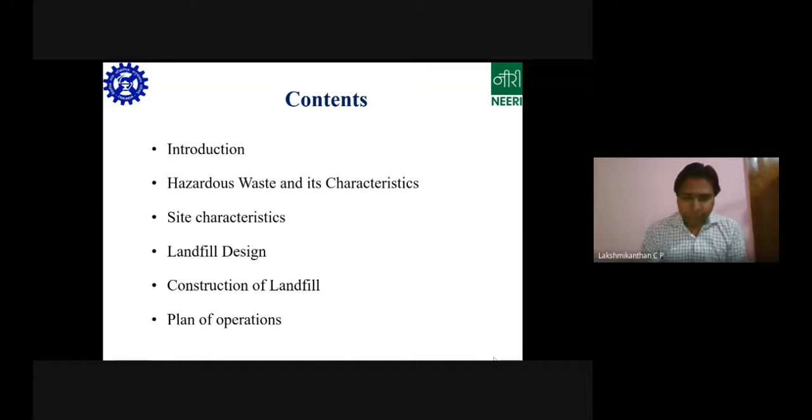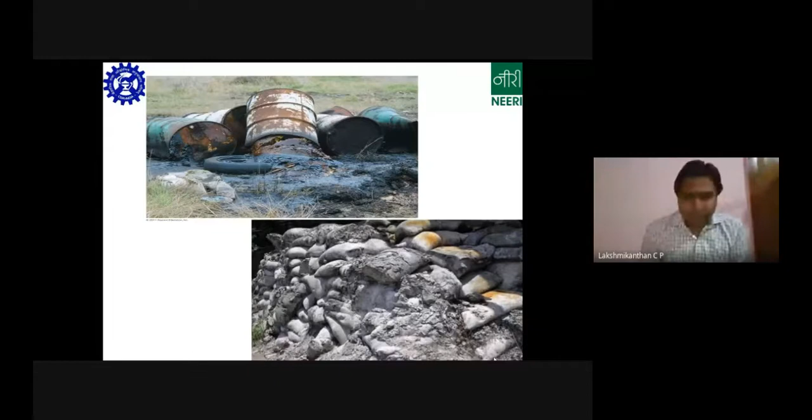Okay, now coming to hazardous waste. What is this hazardous waste? It is any liquid, solid, or gas having some properties. So what are these properties? These properties are, say, ignitability, meaning it easily catches fire. If you put it in an open environment, it easily catches fire without any instigation. So that is ignitability.

Then you have corrosive. If you put it into contact with any metal, it corrodes that metal. It might be a storage tank, a pipe it passes through, anything. Then comes reactivity. Reactivity means it is chemically unstable and it reacts with readily available components. For example, if you put some reactive waste in an open environment, it starts to react immediately, giving some dangerous products. It might be an explosive, or some noxious fumes harmful to human health.

Then coming to the toxic character, it is very, very harmful to living organisms, including human health. It might cause several health problems. It varies. It even goes to the extent of mutation or genetic effects.

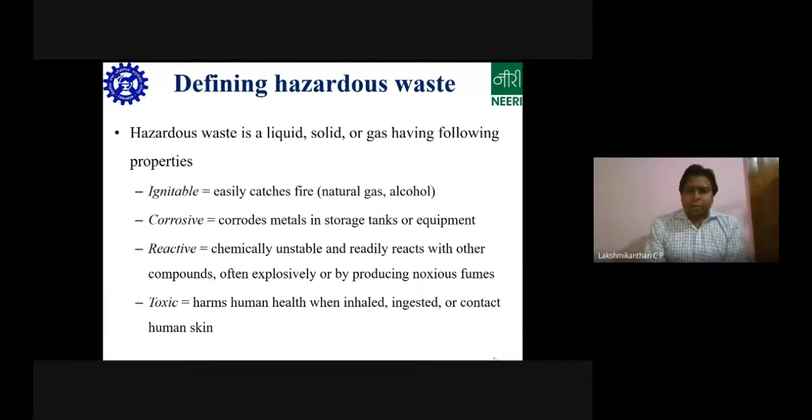So what are the sources of this hazardous waste? Industries are the major sources. Industries produce the greatest amount of hazardous waste. You take any industry, starting from the automobile industry to any chemical industry, pharmaceutical industry. Even e-waste was considered as hazardous waste, but now they have a separate rule for that. Apart from this, electroplating industry, petroleum industry, any other organic industry, tanning industry, leather industry. All these industries produce hazardous waste.

It might be in a liquid form, effluent form, or a solid form. Also your paints, batteries, solvents, cleaners, pesticides, all these also come under the hazardous category. Apart from this, mining also contributes a huge amount of hazardous waste. You know about the mining industry, right? Apart from that, small businesses also contribute, some part of agriculture, utilities, and some demolition waste also.

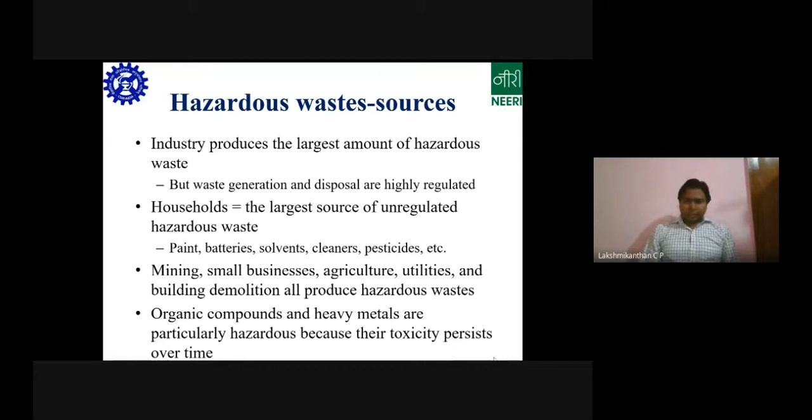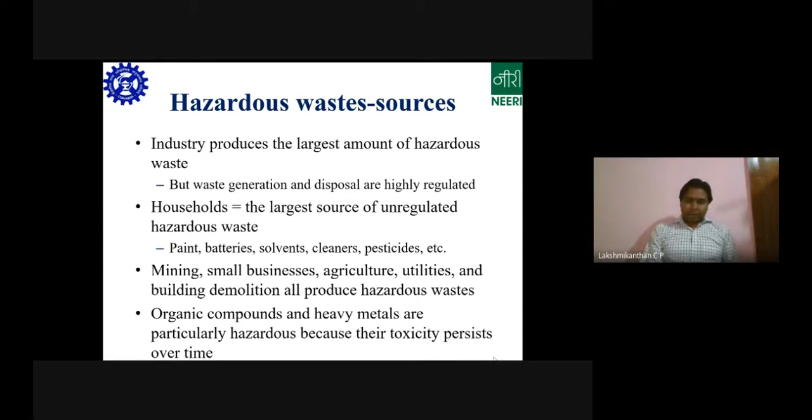Coming to organic compounds, these are also hazardous. There is a list of hazardous organic compounds listed under this category. I won't go into detail, but I'll give you an overview of a few things.

Synthetic organic compounds resist bacteria, fungal, and insect activity. These organic compounds are also hazardous. Some of them are plastics, pesticides, solvents, wood preservatives, etc. They kill bacteria and other naturally occurring organisms. Their resistance to decay makes them persistent pollutants.

There is also a category of pollutants called persistent organic pollutants, or POPs. This category is on the rise in recent days. Most of this comes from daily use items, like powders, makeup items, paints, and other things. All these contribute to persistent organic pollutants.

They are called persistent organic pollutants because once they enter the environment, maybe a water body, soil, or air, they don't degrade. They just stay there, causing harm.

If it is in the water, it is consumed by fish or aquatic organisms. Then when someone consumes that fish through the food web and food chain, it rises up the chain. Once it enters higher organisms, it causes terrific health effects like cancer and other things.

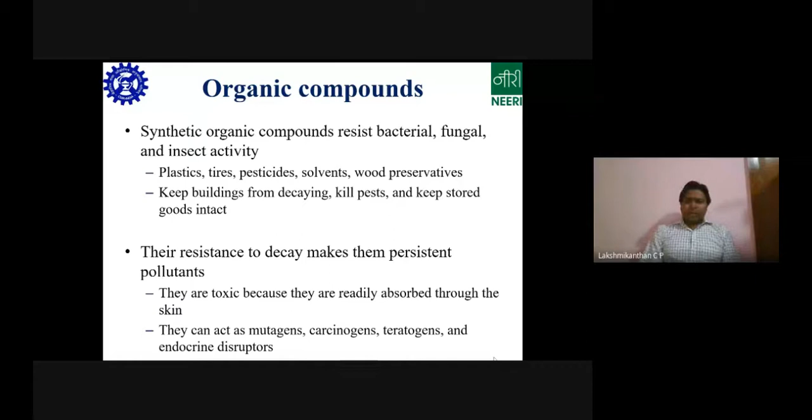All the heavy metals are hazardous. Some are very lethal, like lead, chromium, mercury, arsenic, cadmium, tin, and copper. That is why you have separate regulations and discharge standards for these, whether in water bodies or on land.

These heavy metals are used widely in industries like wiring and electronics. Whatever electronics you get has most of these heavy metals, so you must be aware of that.

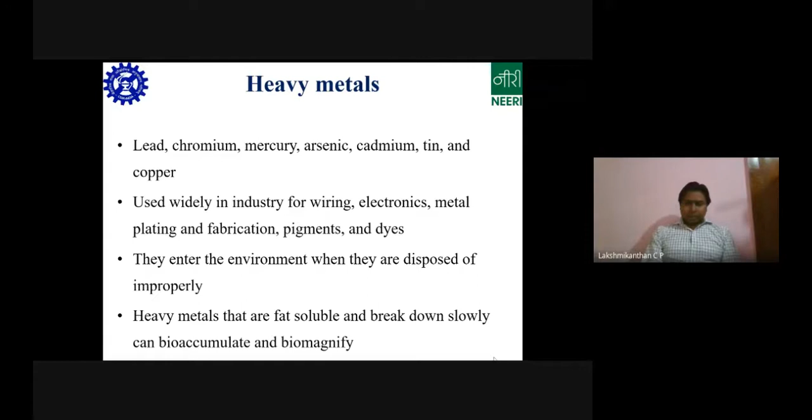Coming to characterization, when we talk about hazardous waste, the most important part is characterization. This is not as simple as other categories of waste, like municipal solid waste or biomedical waste, which have very easy rules, regulations, and treatment methods. The quantity might be more in municipal solid waste, but for biomedical waste and others, you have defined methods like incineration which are being followed successfully to some extent.

But when it comes to hazardous waste, it's really a problematic thing, because there are a number of chemical compounds, organic compounds, and metals involved, with different techniques to remove or treat all these things, and finally bring these hazardous compounds to a form which is not lethal to the environment.

Coming to the characteristics: ignitability, corrosivity, reactivity, toxicity. These characteristics are being tested, and there is a separate test procedure for all these categories. I won't go into detail, but I'll give you some idea of what ignitability is and how it works.

This TCLP test is a toxicity test procedure, wherein you come to know the toxicity level of a particular component. So this is the characteristics part.

Coming to the composition part on the right side, this is proximate analysis. Proximate analysis means you measure all these parameters shown here: physical form, mass balance, moisture content, total volatile solids (TVS), solid content, ash content, elemental analysis, heating value, viscosity, and when it comes to a survey, it's an overall thing that you see directly.

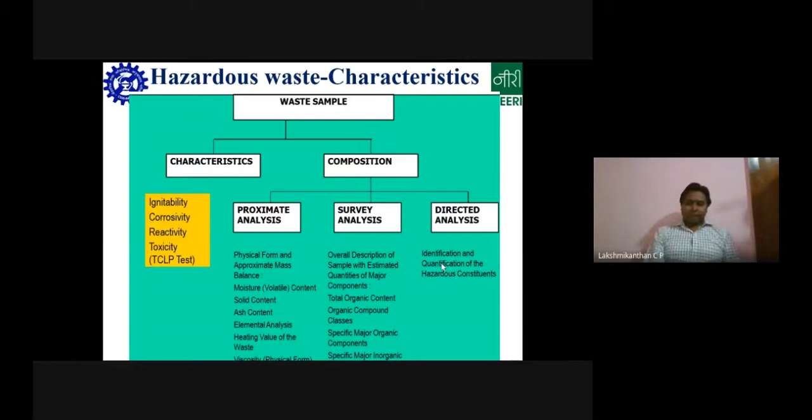So as I told, ignitable means there is something called a flash point. What is a flash point? If materials have a flash point of less than 140 degrees, it means it is ignitable at that temperature. Flash point is the lowest temperature at which evaporation of a substance produces sufficient vapor to form an ignitable mixture with air. So when it comes in contact with air, even a small spark is enough to ignite it.

Examples are alcohols, gasoline, and paints also come under this category. So coming to corrosivity, this applies majorly to liquids, right?

The characteristic is that pH is less than 2. It is really acidic, so it just eats away whatever comes in contact with it. Or, if not, it is highly alkaline, meaning the pH is more than 12.5. So there's a chart given here, I can't zoom in, but it is given here, showing what categories come under what pH - maybe sulfuric acid, lemon juice, all these things.

Then coming to reactivity, whatever components or compounds come under this category are really unstable in the normal or natural environment - things like toxic fumes, gaseous vapors, explosives. Some examples are peroxide solutions. I don't know whether you people have heard about all these things. These are highly reactive, they don't remain in their original form. They react with the environment to give some harmful products.

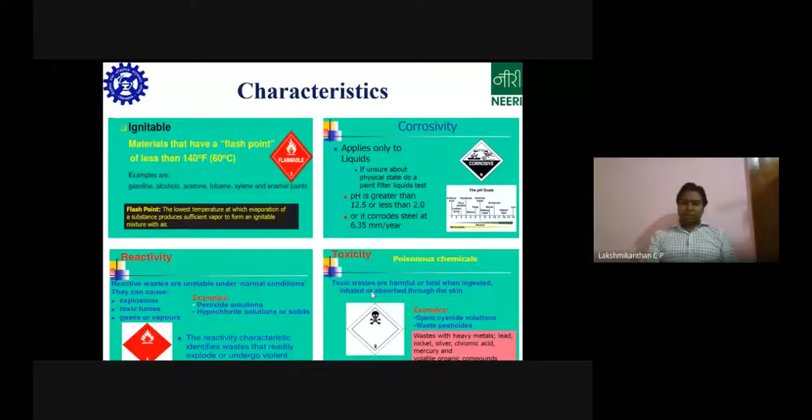Then coming to toxicity, toxic wastes are harmful, fatal, or lethal when ingested. When it goes into your body in any form, maybe you inhale it, or ingest it through food, or it is absorbed through your skin, or in any way it enters your body, then it is lethal. You're going to have some serious effects. So maybe cyanide is one of the things - spent cyanide solutions. Cyanide is used in a number of...

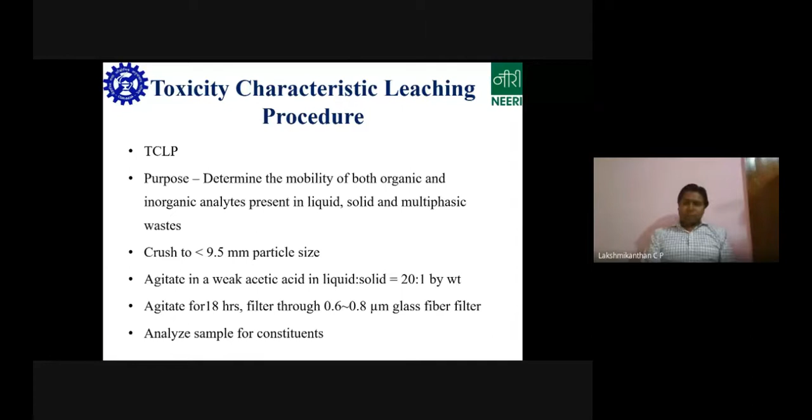So some of the test methods are like SW846. This is for evaluating solid and hazardous waste. There are some example test methods given on the EPA website, that is US EPA, United States Environmental Protection Agency. For example, you have the TCLP test, the method is 1311. There are different methods for different organic compounds, because different organic compounds fall into this category, so you have different test methods, and it varies from 10 to 100.

So method 30, for example, is volatile organic sampling train. Then 31 is for volatile organic compounds. Then 40 is for principal organic hazardous constituents from combustion sources, using Tedlar bags. 50 is for isokinetic HCl and Cl2 emissions. So something like that you have till 100.

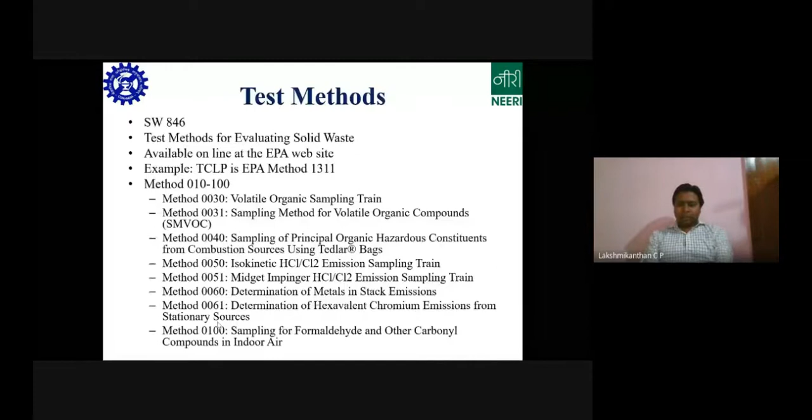So you can check this website for different test methods.

Now the most important part is, before having any final treatment, there is a pre-treatment given to all these hazardous waste compounds. So we will just go through what pre-treatment methods are available, and how it is done.

First comes the adjustment of the physical characteristics. The most important parts are particle size, then moisture content, homogeneity, then viscosity, because they mentioned the multi-state thing. It might be a liquid, a solid, or in between. The viscosity might be a little higher or a little lower.

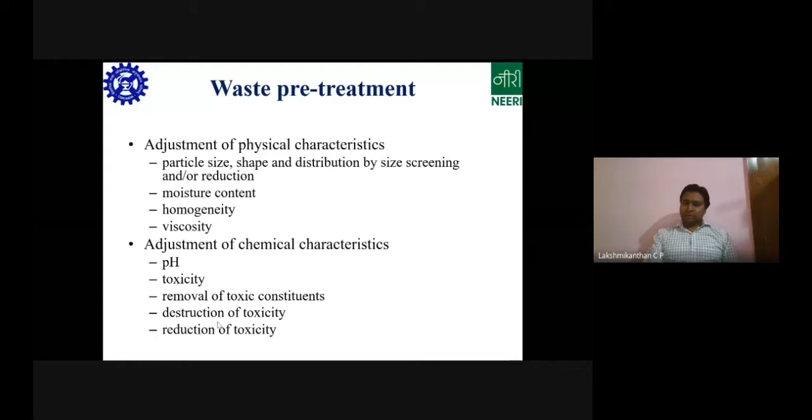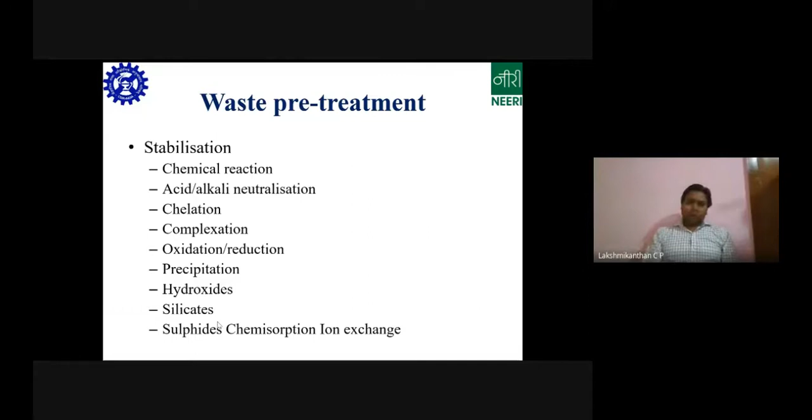Then comes the chemical part. So as you should check pH, you have to remove the toxicity, right? Then stabilization and solidification - these are two very important things in the hazardous waste category pre-treatment methods.

There are a number of chemical methods listed under this category. For example, stabilization is when a compound or hazardous waste arrives, it might have any of the characteristics like ignitability, corrosivity, reactivity, etc., or multiple characteristics. So you have to stabilize them by treating via some chemical process so that it is not reactive.

Some of the chemical processes are chemical reaction, acid-alkali neutralization, chelation, complexation, oxidation reduction, precipitation with hydroxide, silicates, etc., and ion exchanges. I don't want to get into detail, but I will give you some of these procedures which are applicable to some of the waste that are available.

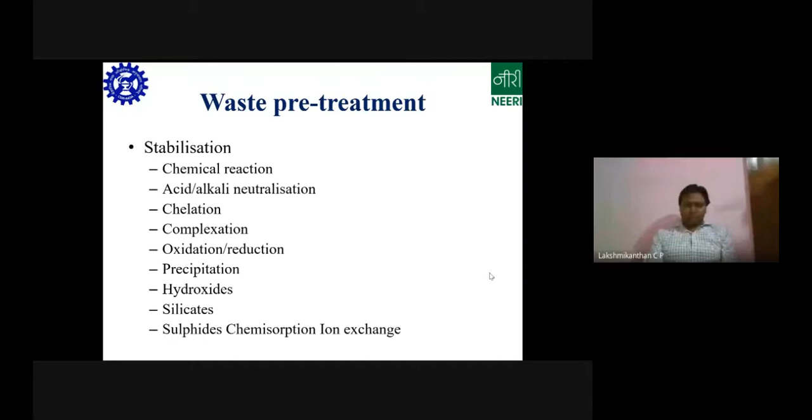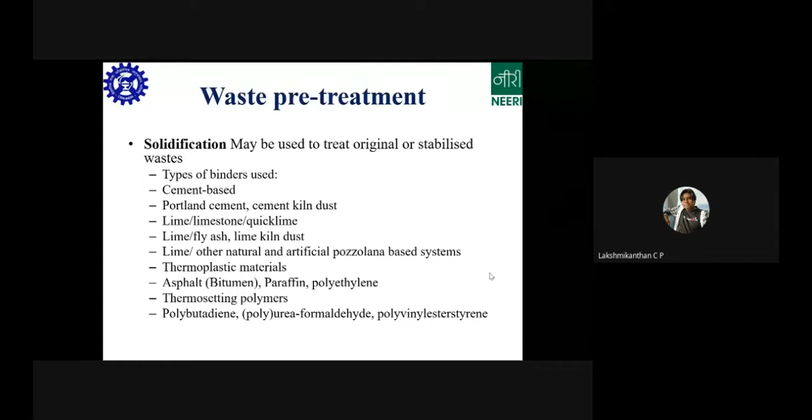Then solidification is nothing but, if it is in a liquid form, we cannot store it, safely handle it, or safely dispose of it. So the solidification part becomes very important to handle the waste. For that, you can use some kind of binders to stabilize it.

Usually they use cement-based binders, then lime or fly ash based binders. Thermoplastic materials are also used sometimes. These are all used to solidify it, and once it is solidified, it becomes very easy to handle.

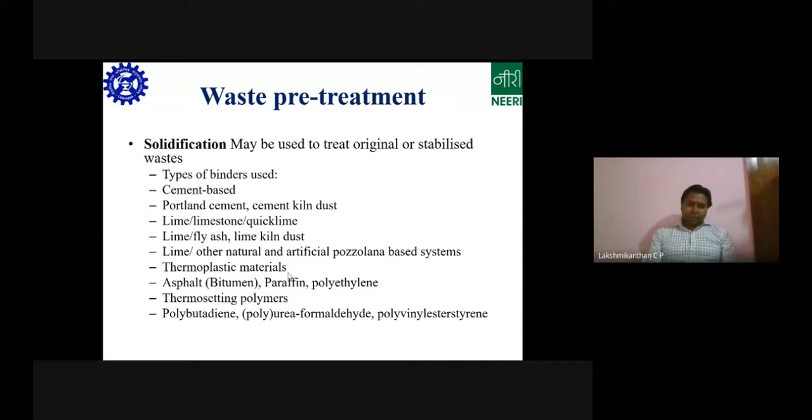As I told, solidification and stabilization techniques are some of the important techniques used to reduce the potential of hazardous waste leaching and improve the handling and physical characteristics. Then it may require some pre-treatment of waste, for example changing particle size, etc. This depends on the type of waste received.

Stabilization is usually followed by solidification - first you stabilize the waste and then you solidify it, right? So solidification refers to techniques that may encapsulate the waste in a monolithic solid of high structural integrity. Something like, if it is in a liquid or semi-solid form, you make it a solid so that it is easy to transport and handle.

Stabilization is the most important part. It refers to several techniques that reduce the hazard potential of the waste by converting the contaminants into the least soluble, mobile, toxic, or lethal form. This is not the final treatment - this should always be kept in mind as a pre-treatment process prior to disposal or landfilling.

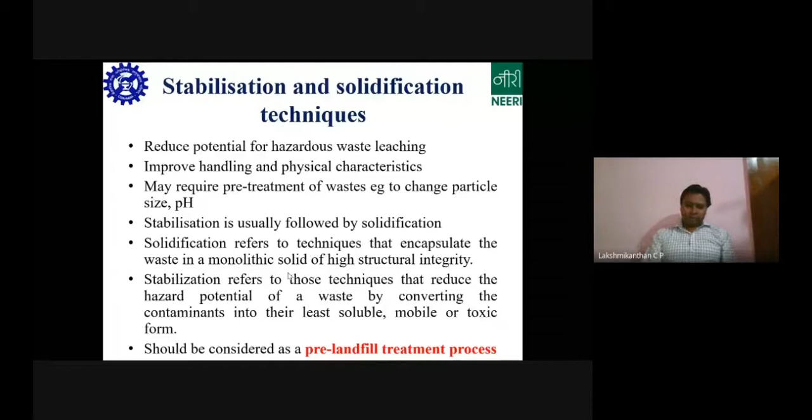As I told, SS is nothing but solidification and stabilization - it's a pre-treatment prior to landfill. This also needs a lot of study, because each type of waste is totally different. Supposing you're getting waste from the paint industry, the petroleum industry, or the tannery industry, obviously each one will have different characteristics.

So it is usually recommended to have a bench scale study or a pilot scale study for some time, to analyze the long-term effects on the environment.

Then you have to decide the end uses based on the long-term effects only. Then hazardous and non-hazardous waste having no leaching properties are good candidates for solidification. So the compounds which don't have these characteristics, that can be used directly for stabilization or solidification.

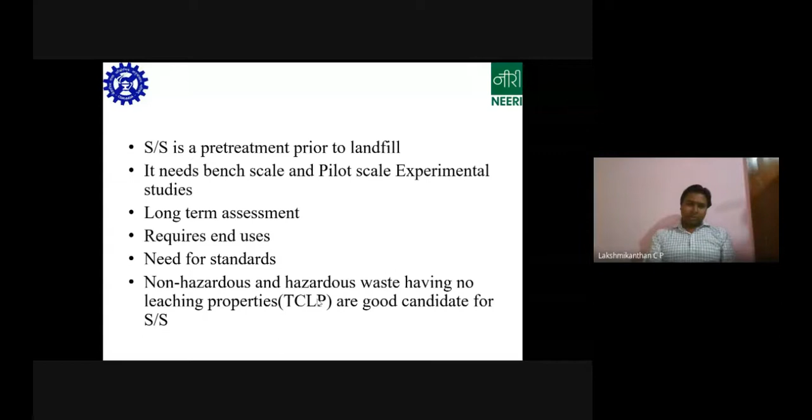So what are the factors affecting the leachability of the waste? Because that is a most important characteristic through which the contaminants or the toxic compounds enter the environment from the hazardous waste. So one of the things is the alkalinity of the waste. Then surface to volume ratio of the waste, then leachate to waste ratio, type of leachate, pH of leachate, contact time, extent of agitation, number of replacements of fresh leachate, extraction vessel, temperature.

So all these things play a very, very important role in leaching of the particular toxic compound or the element. So we have to consider all these things when we are studying about the toxicity of the waste. So these are applicable to different categories.

You might have heard of some gas leak in Vizag during this lockdown. So that was also one of the hazardous gases. So our team from NEERI, they went and they tried to stabilize it. So it was a gas that had settled down with a very high specific gravity or density. It had settled down up to 2 feet from the ground.

So what these people did, they analyzed it and they sprayed some kind of a chemical which will precipitate with it or react with it and form solid precipitates and settle down on the ground. So that is how these people worked out on that. And then later on, when it settled down, the soil or the top layer up till 1 or 2 feet was removed and it was taken to a landfill. Still, there are some tests going on to what extent it has been spread and all those things. But I'm just giving an example.

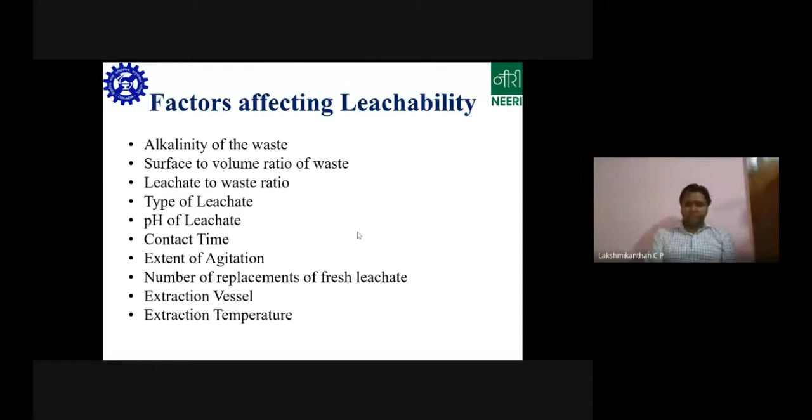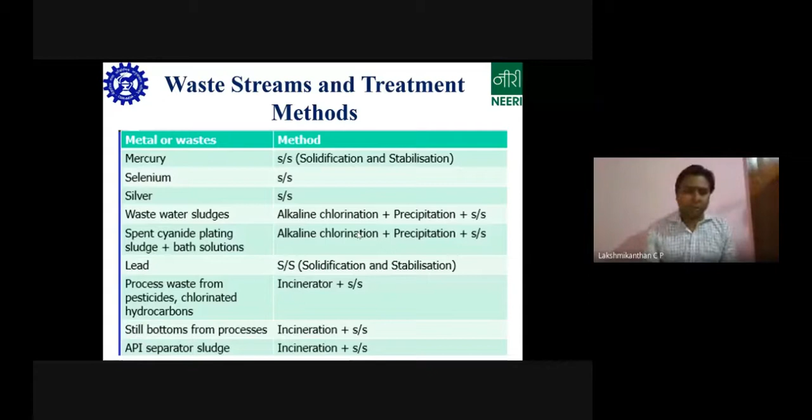So as I told, the waste streams and the recommended treatment methods. Say, for example, if your waste stream contains mercury, then solidification and stabilization is recommended. And even in stabilization, there are different methods, like I told, chelation, complexation, precipitation. So that is further studied, and whatever chemical method is suited for this, that is taken up. So again, selenium, silver is the same thing.

So when it comes to wastewater sludges, it is like alkaline chlorination. Why alkaline chlorination? Because the wastewater sludge contains a huge amount of bacteria or microorganisms like E. coli and all those things. So you remove it through chlorination, which is a disinfection process. So then you chlorinate it, remove it, and then you precipitate it. That is how it is.

So again, spent cyanide plating sludge and bath solutions. Again, the same procedure is followed. Here also the alkaline chlorination helps, because it is in a very acidic thing. So this alkaline chlorination helps in stabilizing it. So lead stream, again, solidification, stabilization.

So process waste from pesticides, chlorinated hydrocarbons. So it is incineration plus SS. And then still bottoms from process. So the slag might be one of the examples, the bottom remains of the processes. So again, you have to incinerate it, and then you can follow SS.

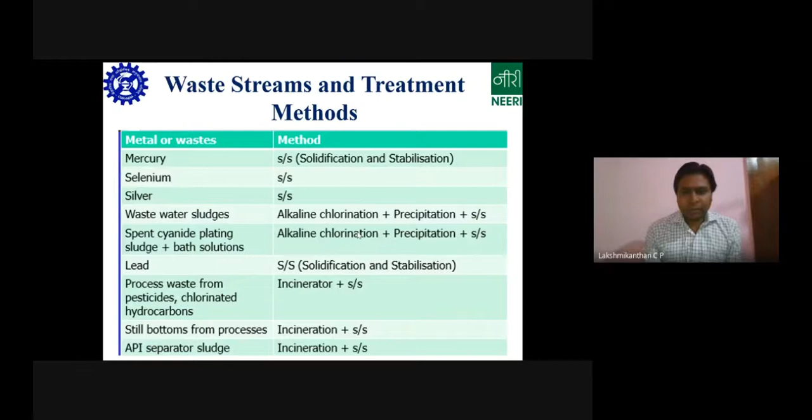It definitely doesn't percolate the soil or the bottom, but it definitely evaporates. But again, this is a problem because it evaporates and it keeps on circulating in the environment. So when there is any rain, or when it mixes with any form of chemical in the atmosphere, again it comes back to the tank. So this is not recommended, but where there is no option, they go for this.

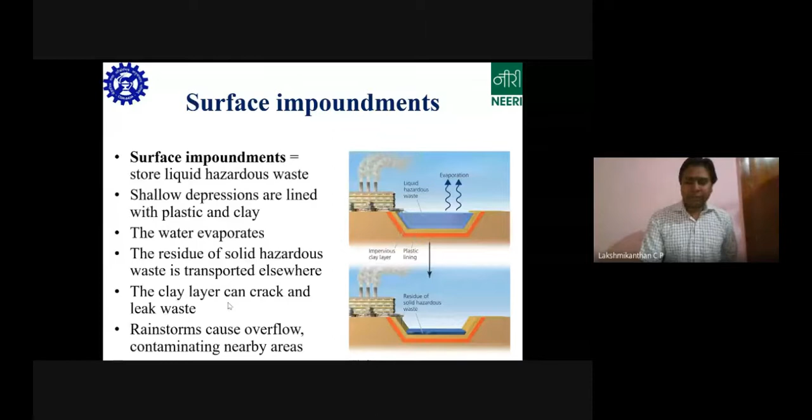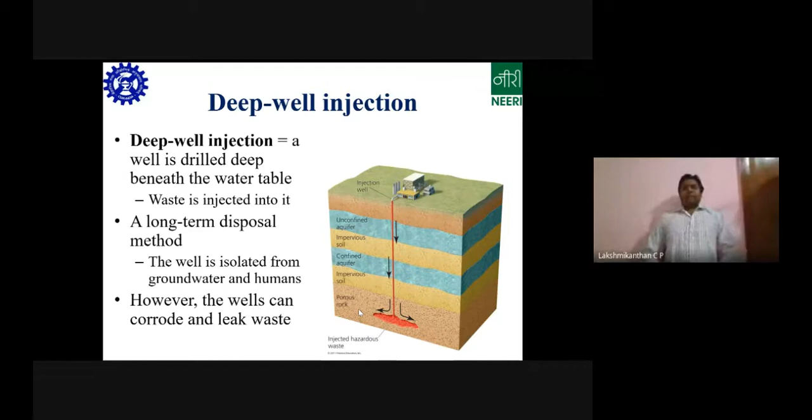So coming to the next thing, they finally take all the waste after the pre-treatment to a hazardous waste landfill. Now, a hazardous waste landfill has a lot of design criteria. So what are the tasks that have to be carried out before designing a hazardous waste landfill? The hazardous waste landfill and a municipal solid waste landfill are totally different, and the rules are very stringent in the case of hazardous waste landfills.

So first is to determine the solid waste quantities and characteristics. Maybe what is the amount that is going to come. Maybe you are having an industrial area, then you can calculate. So this is all done. For example, I think in Bangalore, in the outskirts near Tumkur, there is a hazardous waste landfill. So they usually have it in places where there is a very populated industrial area.

One of the very polluted and populated industrial areas with a hazardous waste landfill is Ankleshwar, Gujarat. So it's a very populated, polluted area. Once you walk into the area, you can see only black colored soil or gray colored soil. You won't find the natural soil there. So it has been polluted to that extent.

So you have all those industries, so you can obviously calculate the amount of solid waste that will come in the future, and then based on that you can design your landfill, because unless you know the capacity, you won't be able to design it. Then perform the boundary and topographic survey. This is very important because if you have any surface water body or any other important natural formation in the vicinity, then it has to be rejected. You cannot have your landfill site there.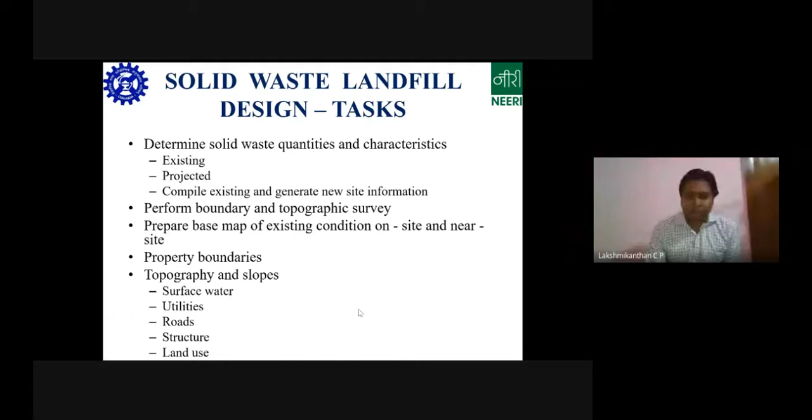Then after this, you compile the hydrological information, because groundwater is one of the important sources, also the industries use it, so it shouldn't be polluted. Say if there is an aquifer, then how long is it, how deep is it, what is its recharge capacity, and other properties. So all these things have to be found out first using a map or other means, GIS or whatever means it is.

Then you have your soil. With soil there are a lot of things, because naturally available soil is used for a number of purposes. For example, depth of the natural soil, texture, whether it is loamy soil, clay soil, silty soil, then structure, density, porosity, permeability, moisture, ease of excavation, stability, pH, cation exchange capacity. So all these come under the soils category. If you're doing a soil test, you have to do all these things.

Then comes the bedrock. If there is a rock type structure, then what is the type of rock, to what depth is the rock there, then presence of fractures.

The fractures are very important, because if you're dealing with any leachate and all those things, then the fractures are very risky and dangerous. The leachate will percolate through the fractures and it will directly go to the nearby groundwater bodies. That is why it is very important. Then groundwater, as I told: average depth, seasonal fluctuation, average rainfall and all those things, gradient, etc.

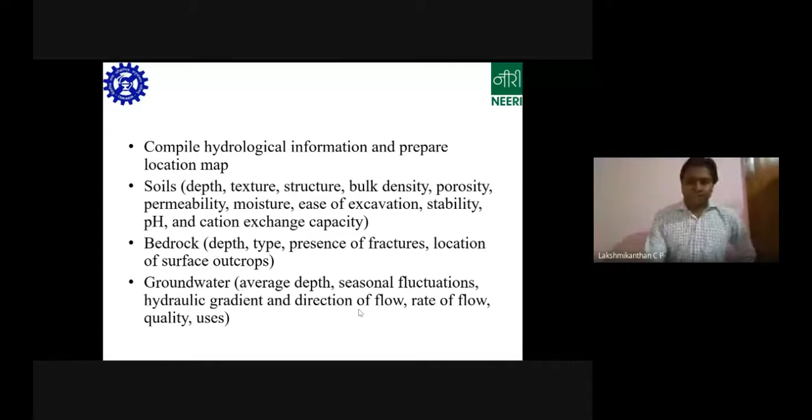Then you have the climatological data. So what is the climatological data? It is the precipitation, that is the average annual precipitation, rate of evaporation, temperature, freezing days. Of course, it won't count in India, but in hilly regions it is a very important factor. And then wind direction. All these data nowadays you can get directly from the net or Google. You have to consider all these data before designing a landfill facility.

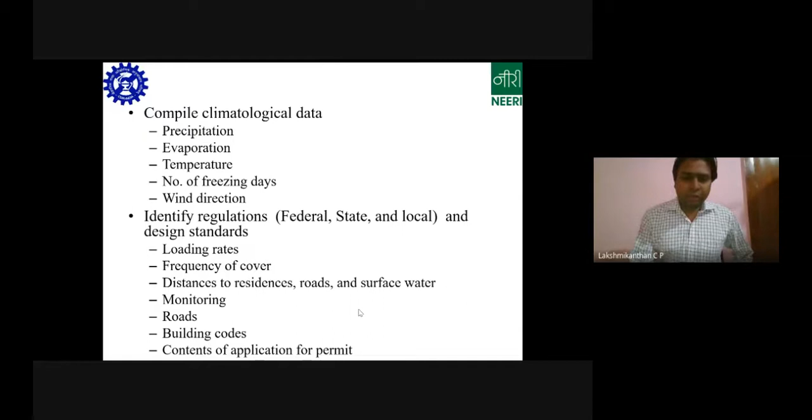Then regulations: central, state, local. So you have the hazardous waste regulation. You know that, right? There is a manual given by CPCB. In that there will be, for example, liner composition, cover composition, and the conditions where you should have a hazardous waste landfill, all listed out there. So you have to refer to that before designing it.

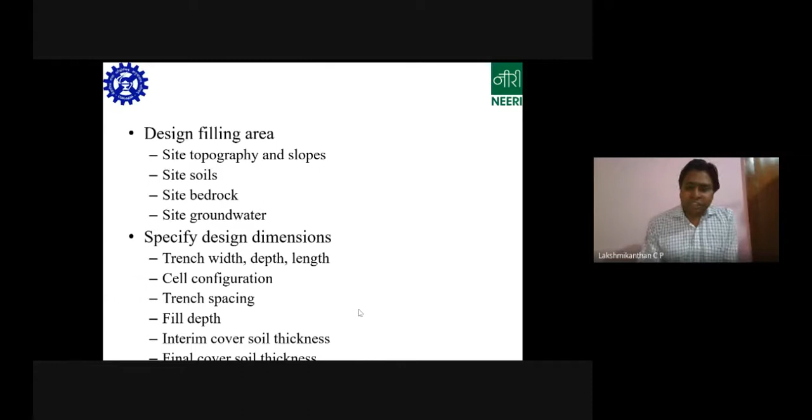Then, once you do all these things, you go into the real designing, that is designing the filling area, like site topography, slopes, basically the outer structure of the landfill. Once you design this, you go further into it. The whole landfill is divided into different trenches, different cells, and then what is the fill depth, then you have your leachate collection systems. All these things will come under specify design dimensions.

So now I'll just show you a case. You can see here there is a location, waste collection, then the waste generation. Then what is the topography? It is a variable ground. What is the subsoil? Hard gravel soil underlain by bedrock. Then what is the annual precipitation? Groundwater is at 200 depth. Something like that, you have to get all the site characteristics.

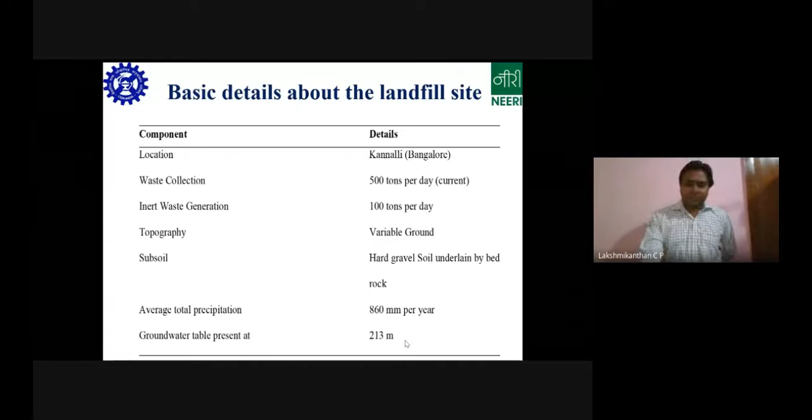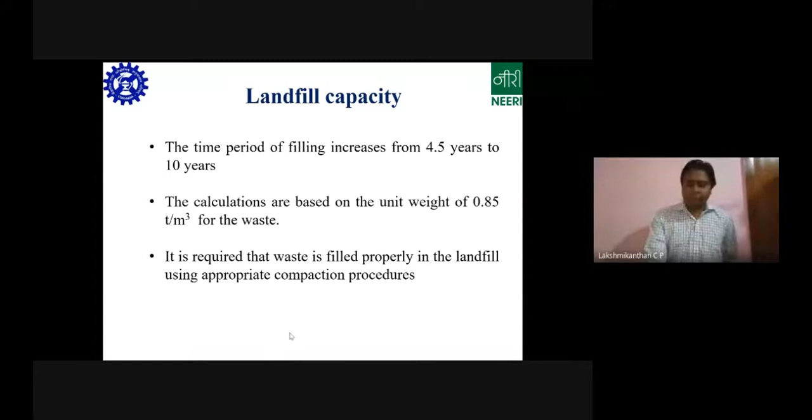Then when it comes to design, there are three important factors: landfill capacity, liner system, and leachate collection system. Based on this, you design the life of a landfill based on the future capacity. As I told, the daily input, and based on that, you see for how long it will be able to serve the purpose. Then you have the capacity, like waste generation per day, assuming this example: 100 tons per day.

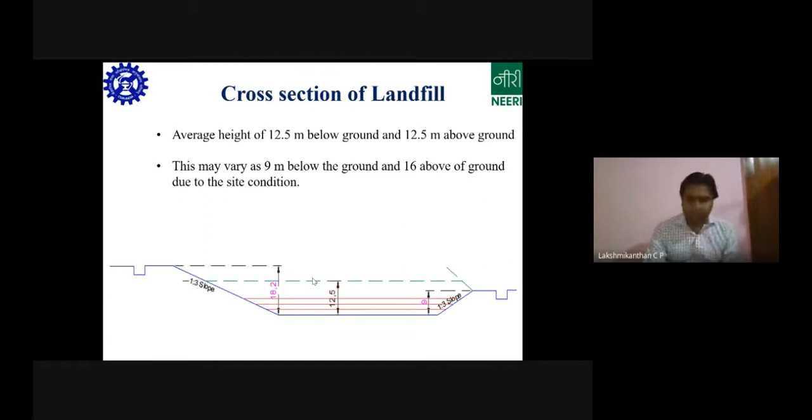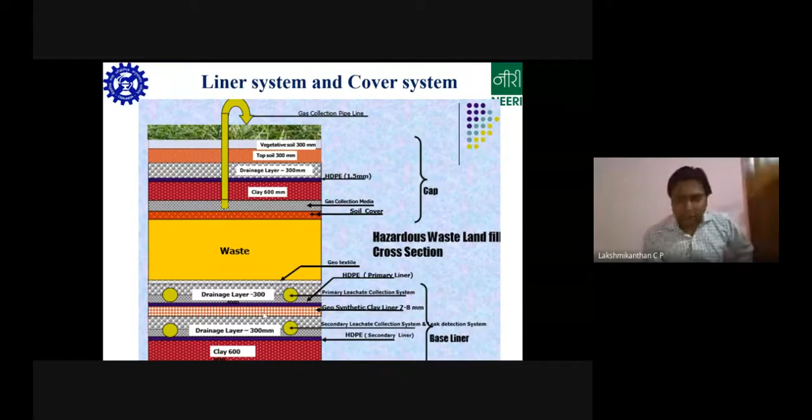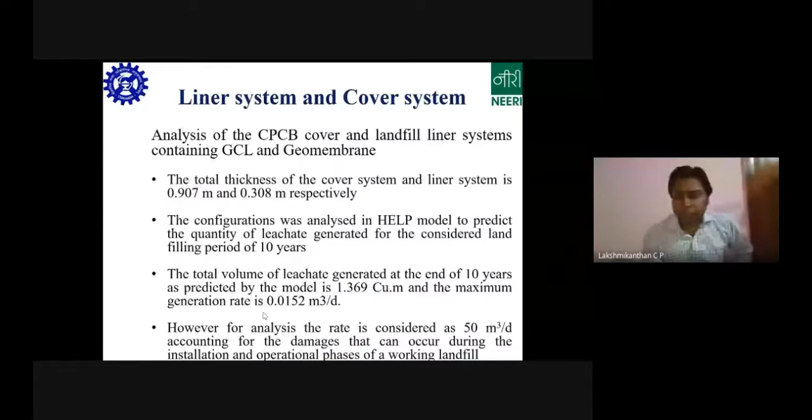So for doing that, you can use some softwares. What we usually do is we use two softwares, HELP and POLLUTE. HELP is nothing but hydrological evaluation of landfill performance. So you will come to know what is the amount of leachate that is generated after some particular amount of time. Say for example, this is the years. So for example, 10 years, what is the amount of leachate generated in the waste? This software has the option of giving the category of waste. So if you give the hazardous waste category, then based on the precipitation and climatological conditions, it will calculate and show.

So here in this case, it is like maybe 1.5 or 1.4 meter cube of leachate. So it is very less compared to the total quantity. That much will be generated after a period of 10 years. So this is per day, right? So this is a very important or useful tool for us to design the leachate treatment system. Because unless you know the total quantity of leachate that is being generated, it is very difficult for you to design a leachate collection system.

So for example, I can give you a lot of examples. In our Bangalore only, the Yelahanka Mavallipura site, of course it is not a hazardous landfill, but it is a municipal solid waste landfill. I'm just giving an example of wrong design. I don't know how these people designed it. They just designed a leachate treatment facility and storage capacity of 1 lakh liters per day. But what happened is, when there was rain during monsoon, it was around 8 to 10 lakh liters per day. So these people didn't know what to do. All of the leachate was getting out of the site and getting mixed with the natural soil, natural water bodies, etc. That kind of thing shouldn't happen. So it is better to quantify the amount of leachate before designing the facility.

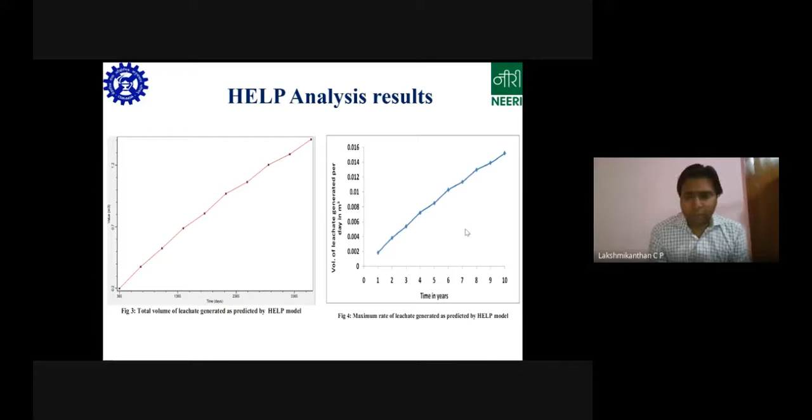So one more is POLLUTE. POLLUTE will give you the specific metal or whatever component you choose, organic, inorganic. Maybe you're choosing chlorine, so you need to give the concentration of chlorine, and the necessary details for the liner system. So it will calculate and show, maybe after some particular years, 30 years, will it pass through the liner, or to what depth of soil it will be percolating. So this is again a very useful tool. So HELP is for quantification. This is for the particular element.

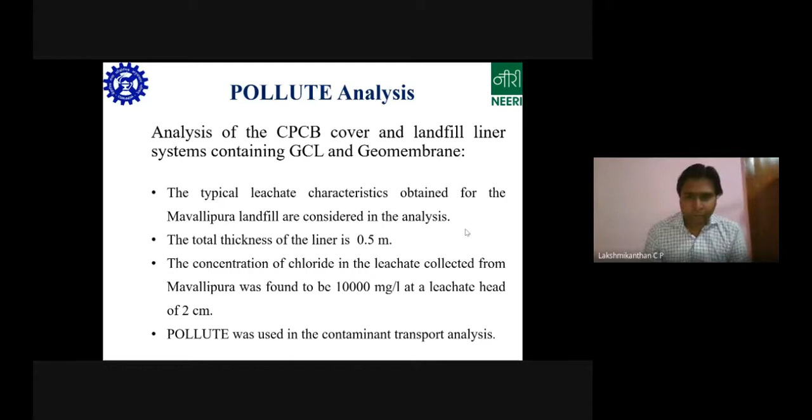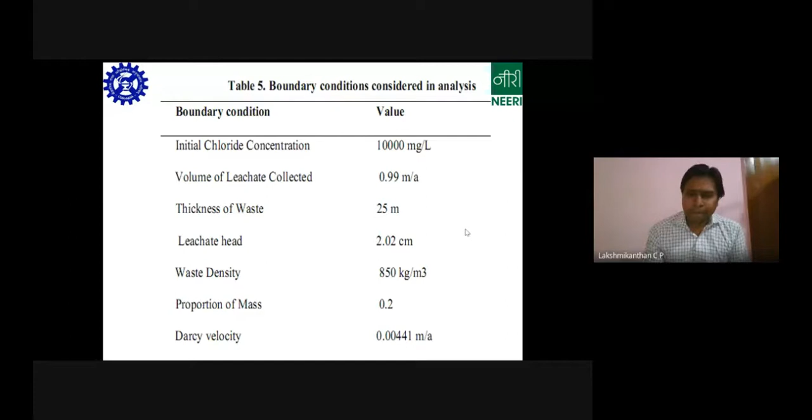Say for example, in this case I've just taken chlorine. You can give all these parameters, what is leachate head and all those things, density, mass - all these inbuilt characteristics. Once you know the values, you can enter them and it will give this example. You can just see.

I've analyzed for 5, 10, 15, 20 and 30 years. After 30 years, this is the depth - 20 meters. So it says that even in the presence of a liner system, your pollutant, that is chlorine, will go through the liner system and percolate to a depth of 20 meters. So that is the analysis.

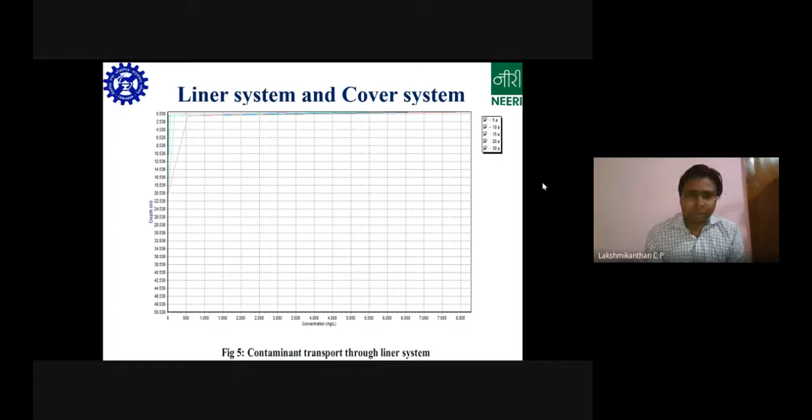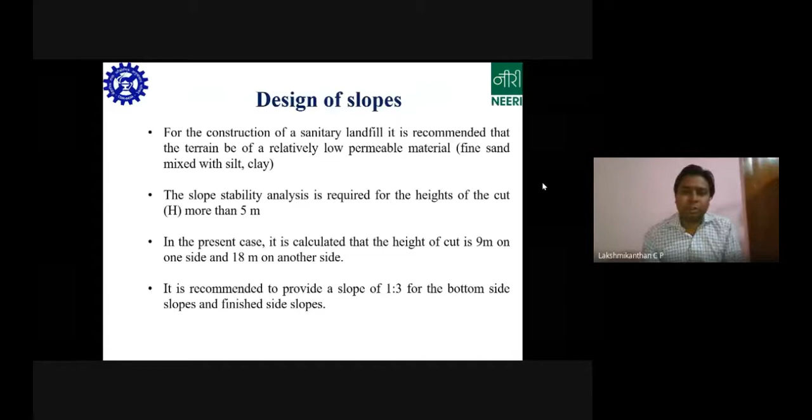After you get into the quantification and characterization, then you can go for the design of slopes. There are again some softwares being used - you might be aware of this, Slide and all those things - just to make sure that if you're constructing above the land, it doesn't fail because of external stress, since there will be a lot of activities happening in or near the landfill. Just to make sure it doesn't fail at a later stage.

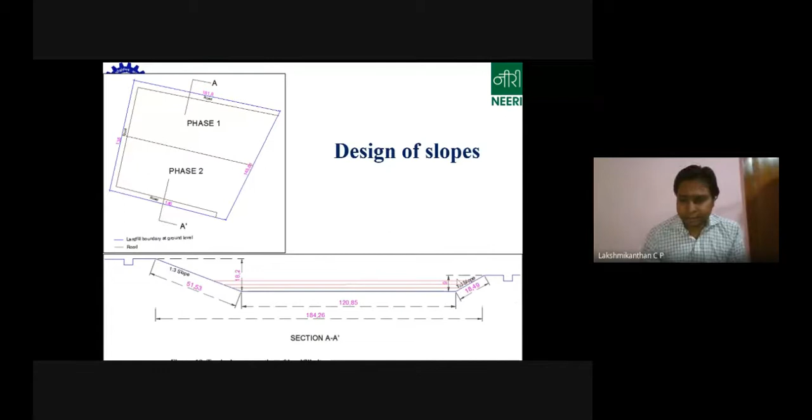So this is a rough diagram of a case - this is phase one, phase two. This was the site specific characteristics. As I told, one side the level is uneven, so accordingly you design it, right? So this is the slope stability analysis.

Anything above 1.5 factor of safety is considered to be safe. This is the slope above the ground that you're giving. In this case it is 1.8, so 1.8 is safe in this case. Anything less than 1.5 is not safe. So you can analyze and then accordingly design your slopes.

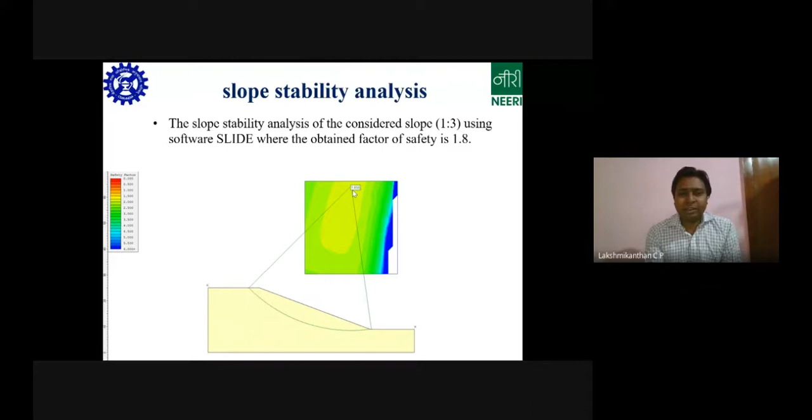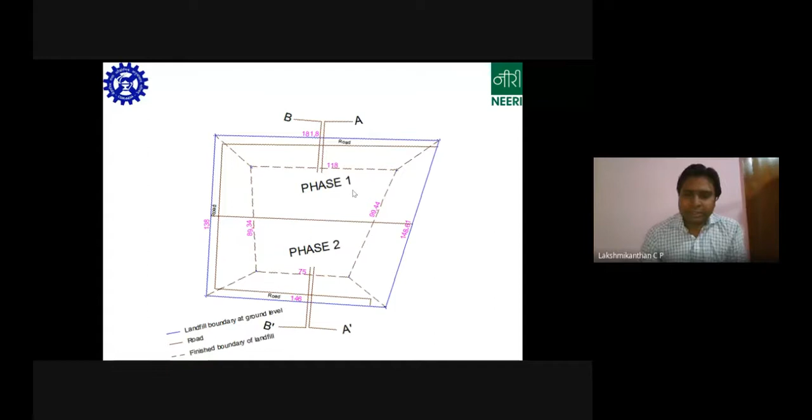So this is the final thing that we had designed - here we are providing 1:3, 1:3, 1:3, and then this is the design. Once we have arrived at this design, this is a volumetric design - nothing but the external dimensions of the landfill. Now when we go inside, there are different components like the gas collection system, leachate collection system, and all those things. We'll go see that.

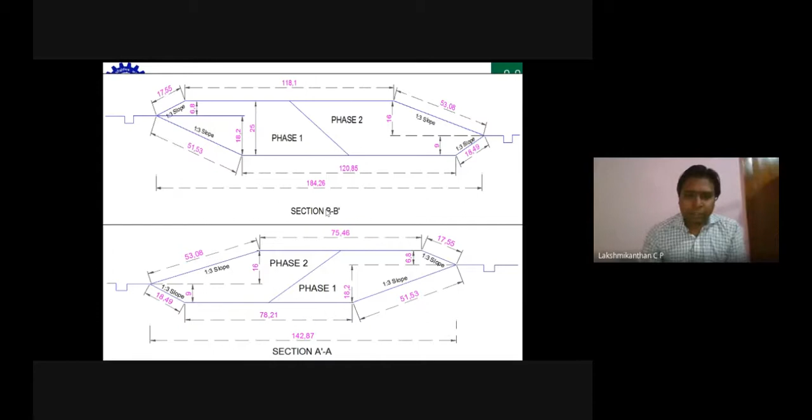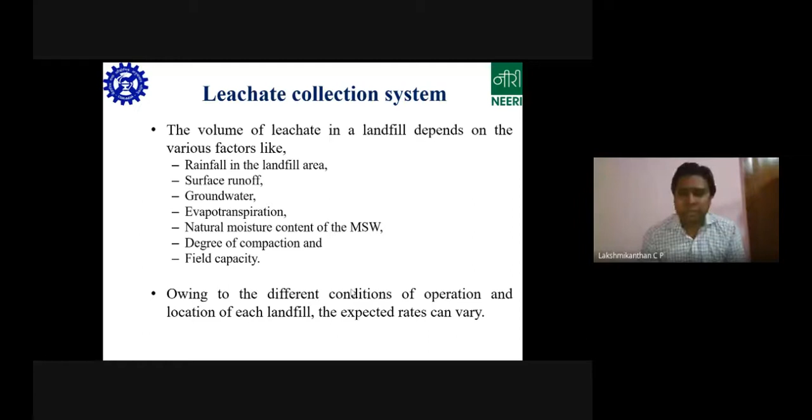Coming to the leachate collection system, you can see all these parameters are considered, and it is very important in determining the leachate collection facility: rainfall at the landfill site, surface runoff, groundwater, evapotranspiration, degree of compaction, field capacity, etc. All these things are given in a manual. So then we designed a leachate collection system like this.

What is the plan area of the landfill? It is around 22,000 meter square. Then annual precipitation in Bangalore - 80% of precipitation in 4 months. So accordingly, we have estimated this much of leachate.

Coming to the collection pipes - these are HDPE perforated pipes that are placed. You need to have around 150 diameter pipe because you are getting that much leachate per day, so accordingly it is designed. Then total length is calculated based on the total area of the landfill and how many connections you want to have.

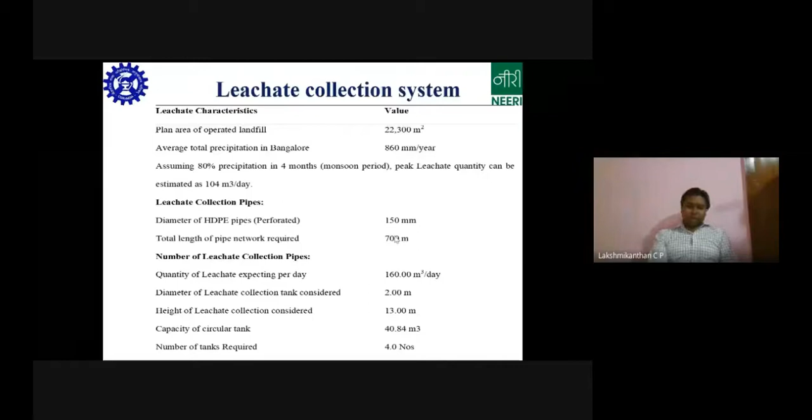There is a separate rule given for that - say for example, in 1 acre you can have four injection wells and then leachate collection pipes like that, right? Then you have the diameter of the leachate collection tank, height of the tank considered, number of tanks needed, and all these things. So you can design like this - something like you're considering it 2 times so that it will be safe.

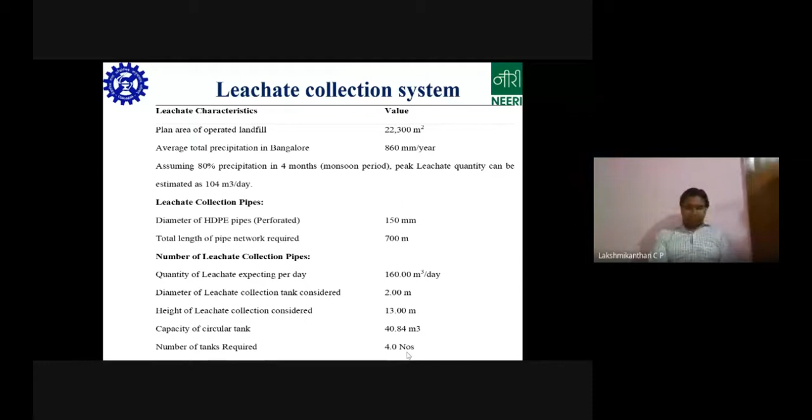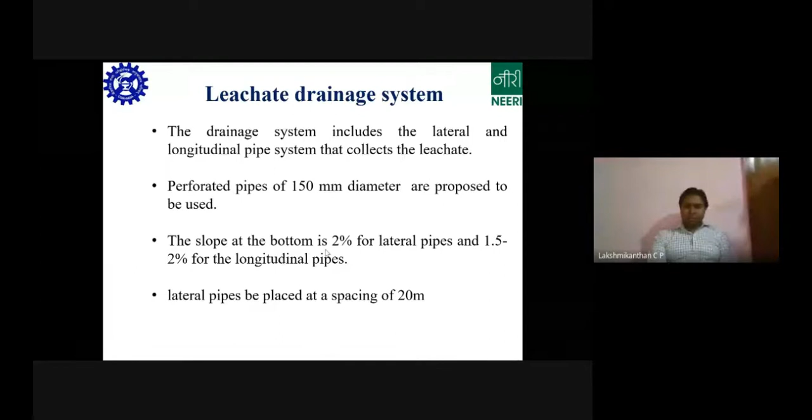So this is a drainage system. I'll just show you the picture. It is just mentioned what is the slope at the bottom of the lateral pipes and all those things. So this is the drainage system.

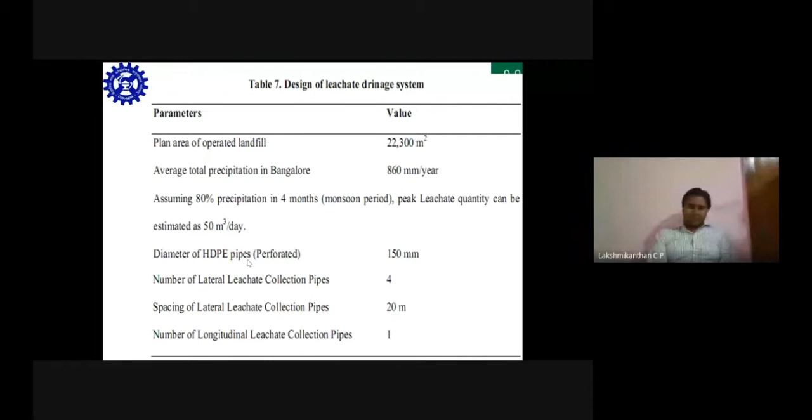So that is a collection system. Then this is a drainage system, something like this. So you saw that design. So in this design, we are placing this many horizontal pipes and lateral pipes. This is the horizontal pipe one, and these are the lateral pipes.

So there is a slope provided here at the bottom, say 2% slope. So what happens is all the waste, all the water gets collected in this pipe through the lateral pipes, and it is finally taken to some kind of collection system. So this thing, it will be like this.

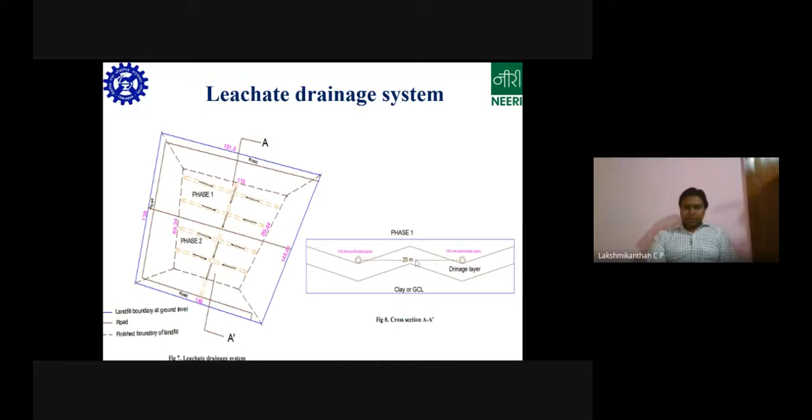So here we have a spacing of 20 meters, and then we have these 150 mm perforated pipes. So like this. Here is one pipe, and then you can see here is one pipe. So this spacing is 20 meters, right?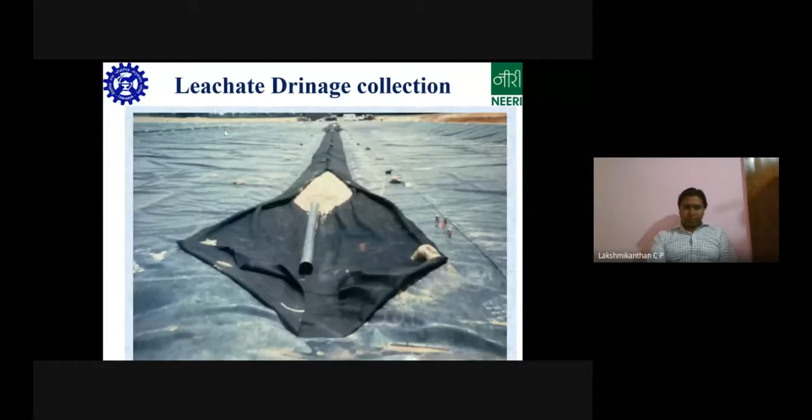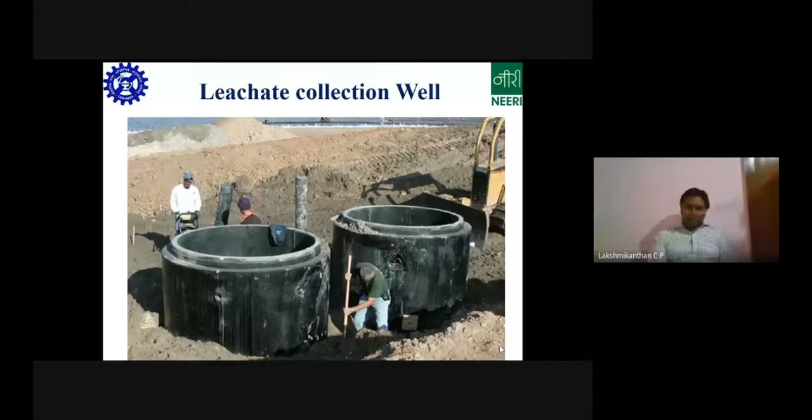So this will take to a common pipe, horizontal pipe that will be here, and this pipe will be taken to the collection system, something like this. So this will be built at the bottom, something like this. So this one horizontal pipe will be connected to a number of lateral pipes, and the leachate will be collected here.

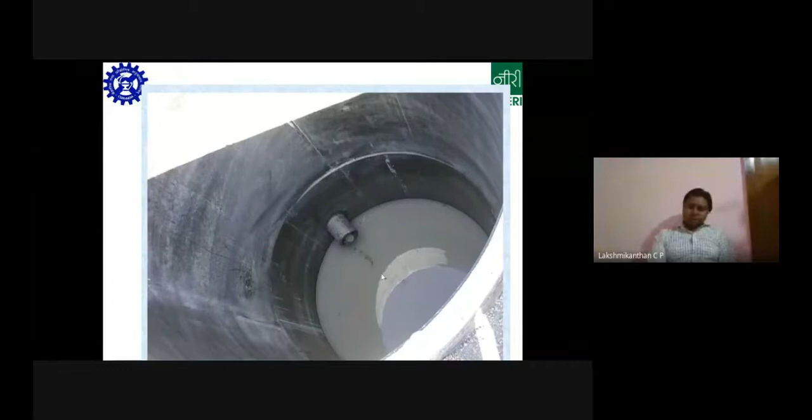So after this, the leachate might be treated at the site, or it might be transported to an effluent treatment facility. That depends on the site on how they are going to deal with that. The major thing is, according to the rules, they have to collect the leachate. So if they are sending it to a leachate effluent treatment facility, that is fine. Or else if they are treating it themselves, like solidification or stabilization, that is also fine. So it depends totally on the site.

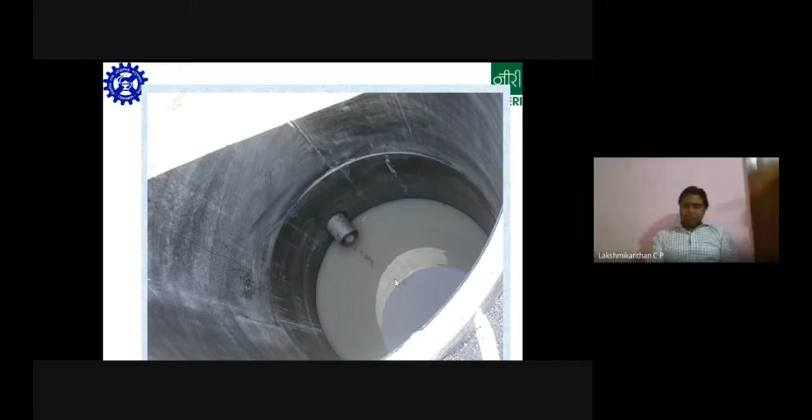Coming to landfill, land management plan. This is also very important once you do the leachate management, because the landfill is active throughout the year, and during the monsoon season, there might be incidents of fire or some kind of other explosions in the landfill during the peak over-generation of leachate.

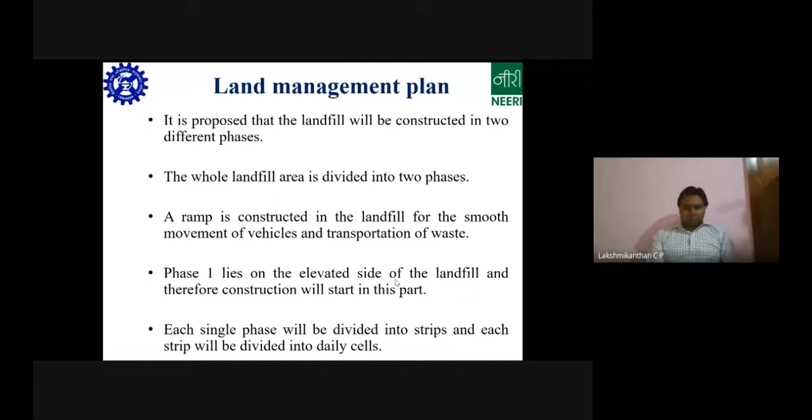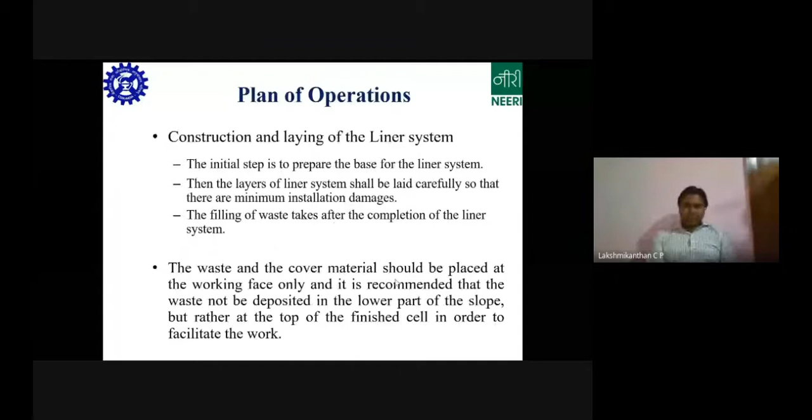So for that, how do you go about it? How do you cover it? All these things are given in this. So you consider all these things as I told before. I'll just run through it because I think I'm running out of time. So I'll just show you only the picture diagrams.

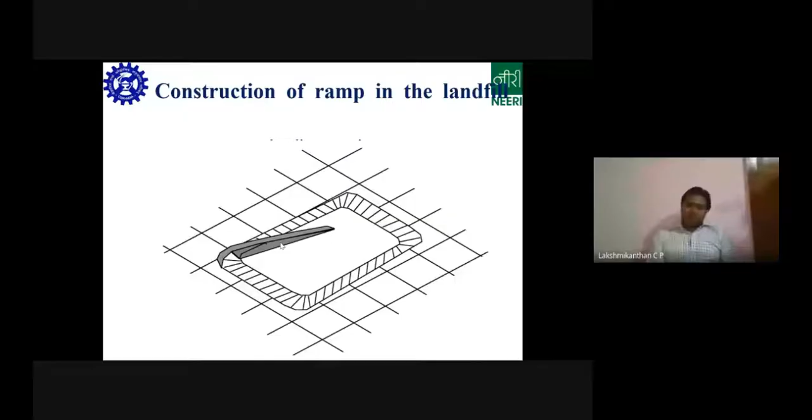So it will be filled in strips. Strip 1, strip 2, maybe the size of the strips may vary, starting from 3 meters to 10 meters. That again depends on the landfill site. It is site specific.

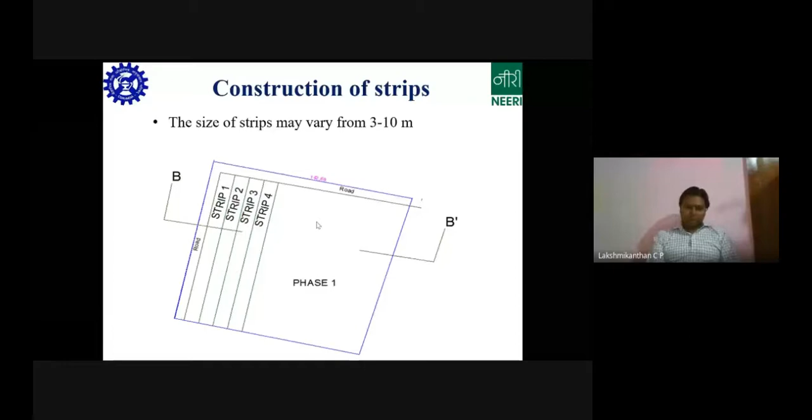So there might be a working phase, there might be a closed phase. The cell 1 is being filled. Then all these things should be covered with an HDPE liner or a geotextile, so that the water doesn't enter or percolate through it. So all this water, when there is precipitation, will be a runoff.

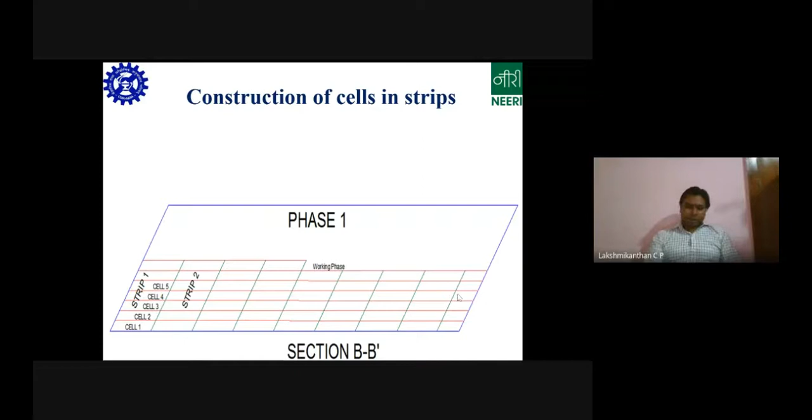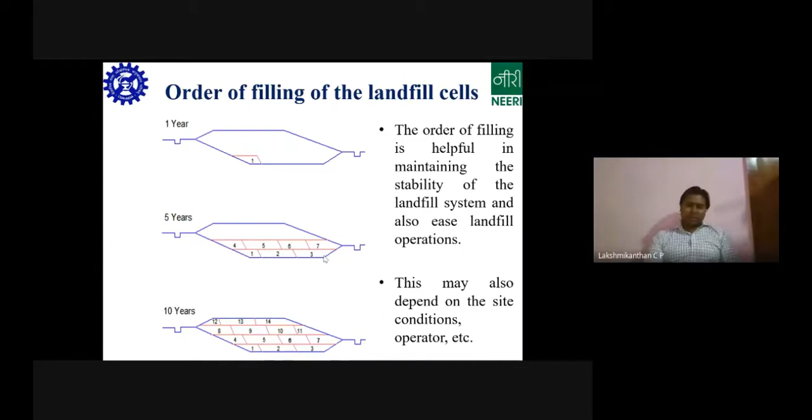So the order of filling should be something like this. In this, then this. So once these cells and this layer is complete, then you close it. This is how it is done. So yeah, any questions?

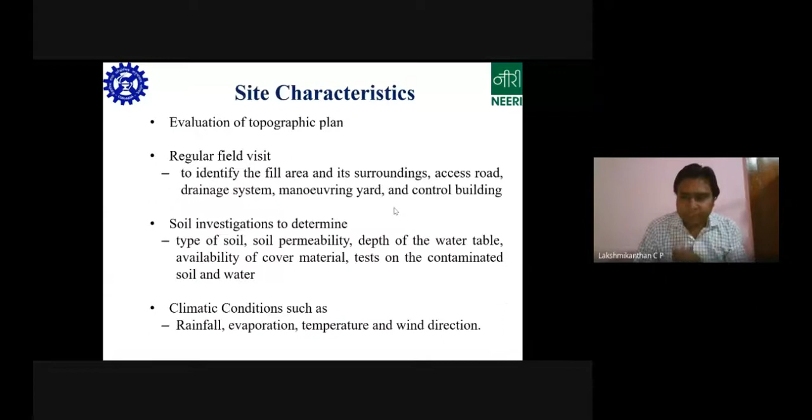Yeah, if anybody has any questions, kindly unmute and ask. No one has any questions? Okay. Sir, it looks like nobody has any questions. Yeah, so hopefully they have understood. Either they have understood or they have not understood completely.